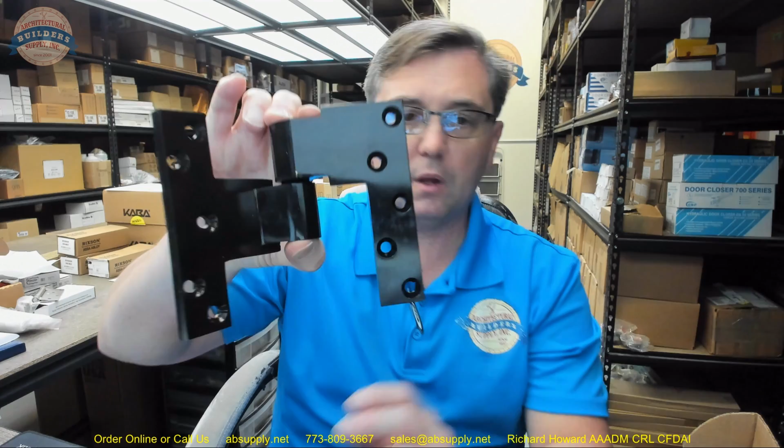And this video is going to serve as a visual review, a review over the ever-evolving oil rubbed bronze. It's awfully dark to me. I'm going to stop short in saying that it's black because under the reflection of a certain light, it will have a difficult to detect bronze tone to it.

You know, the issue with oil rubbed bronze, and I'm not an oil rubbed bronze apologist. It's a finish that's subject to interpretation in the sense of change. It is an unstable finish. It is manufactured by lots of people that all have a different process by which they do it, and it turns out differently every single time. Understand, when you order oil rubbed bronze finish, manufacturer A, manufacturer B, C, none of it's going to be exactly the same.

One hallmark of the old days, the second half of the 19th century, you would be able to buy all of your hardware from a single manufacturer. And what was nice about that, I imagine, is that their finishes probably matched pretty well across the board. This order has hinges from McKinney in oil rubbed, don't match this. Pivots from Rixson in oil rubbed, don't match that. Roller latches from DCI in oil rubbed, none of it matches. And it's because they're all different. That's all there is to it.

If you want a consistent finish on your hardware, order something that is by definition consistent. Oil rubbed bronze, or 613 or 640 for that matter. They're both oil rubbed bronze. 613 means on a bronze based material. 640 means on a steel-based material. The definition of either of those is inconsistent. So I suppose just be mindful of that.

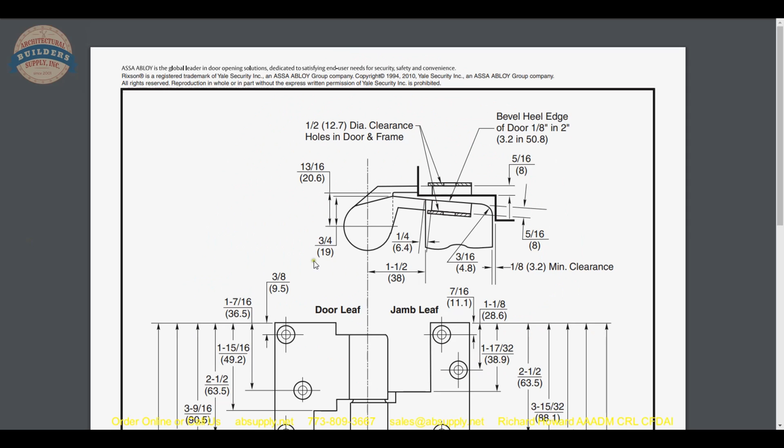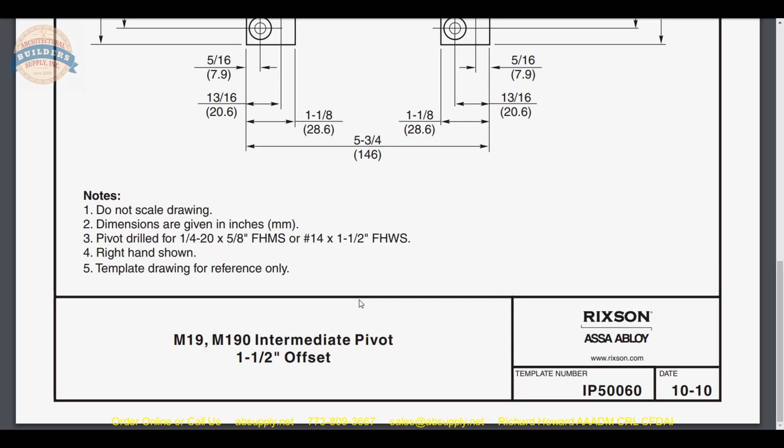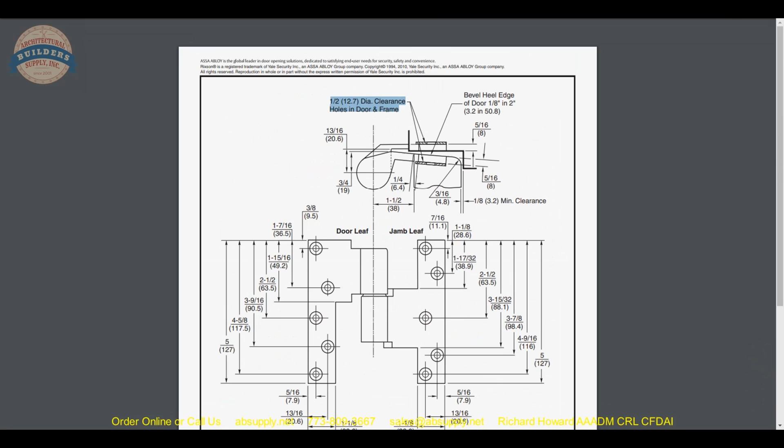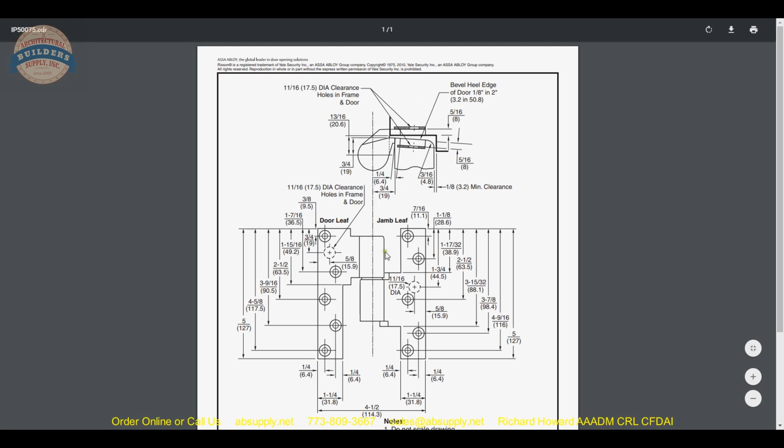The only thing I can think of is that might be a reference and not belong on here, to when you are doing an electrified pivot. That would make sense that you would have a 11/16 inch clearance for that. Yeah, they're showing that same sort of reference. They show it here and here as well,

and not here. I just finished saying that I've never seen anything on a template that doesn't belong there. But in this case, it doesn't belong there. This is not an electrified pivot. So you have all of these dimensional properties, and that will help you definitely lay out what you're working on.

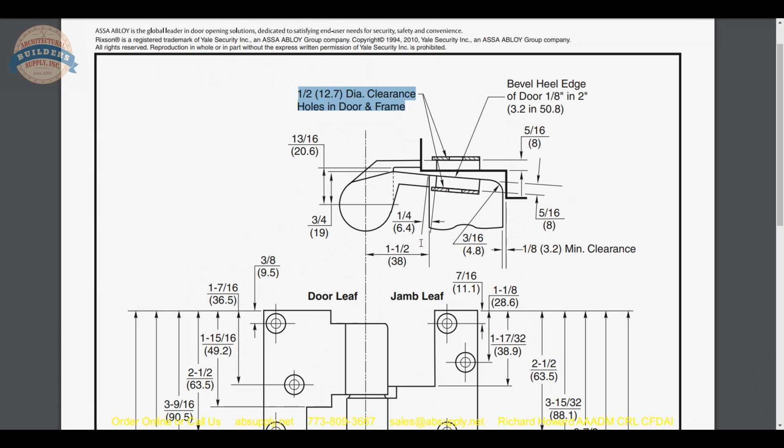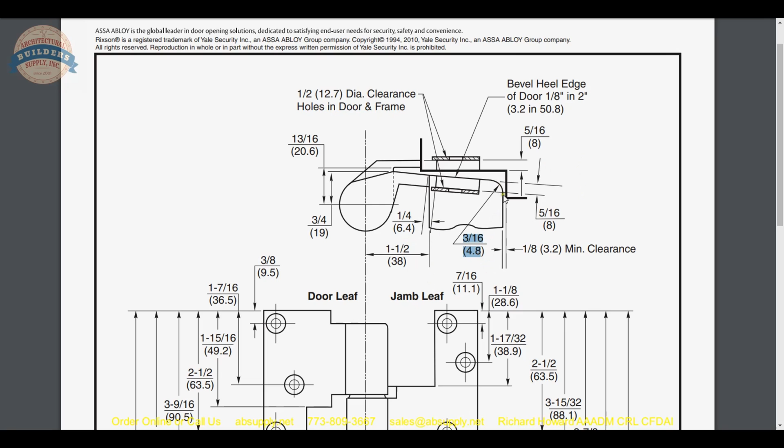There are three notes here that are actually important. 1.5 inches, and we're going to talk about that. That is the center line of the vertical axis of pivoting measured from the face of the door. Okay. The second is this 3/16 chamfer that they want on this edge of the door, and that you need to have 1/8 of an inch between the push face of the door and the face of the stop.

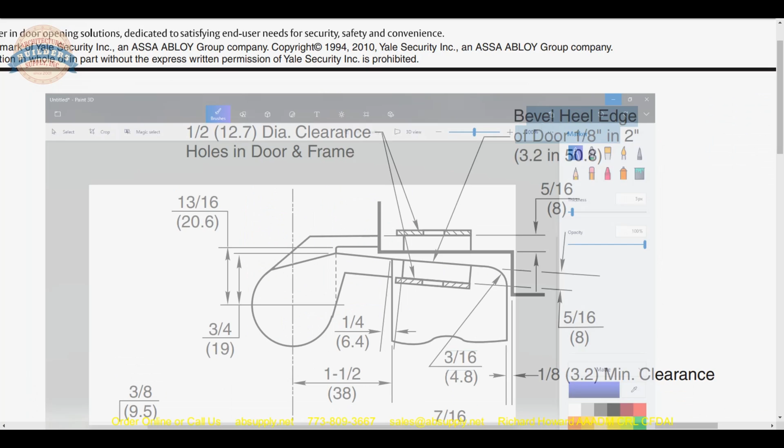That's number 2. Number 3, they want a beveled edge door here, to relieve the possibility that you're going to be hinge bound, or in this case pivot bound. Best practice would be to put a bevel on here. 1/8 and 2, what does that mean? Let's talk about what that means now. Actually, I have a very elegant way to show you. Start by defining it as the following.

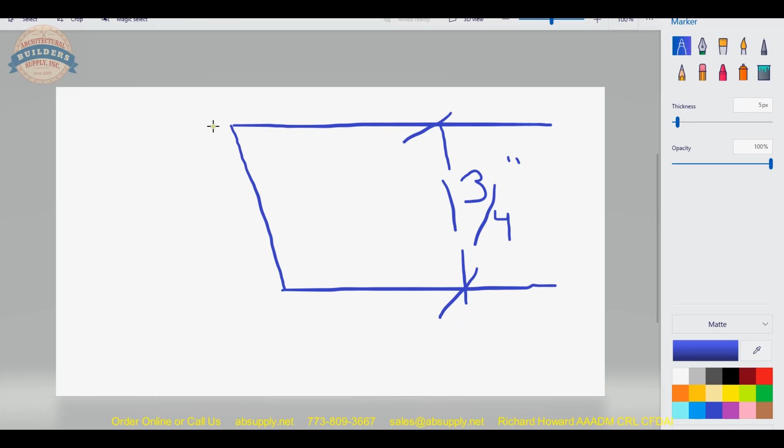You have a door that's beveled, and of course that bevel is very much exaggerated, and you have your thickness, typically 1 3/4 inch thick. Okay. The distance from here over is based on the formula 1/8 in 2.

If I draw this line straight down, the x dimension is the formula. This is 1/8 of an inch for every 2 inch in door thickness. Okay, that's 1/8 and 2. So obviously this dimension is going to be slightly smaller than 1/8 of an inch when we're dealing with a 1 3/4 inch thick door.

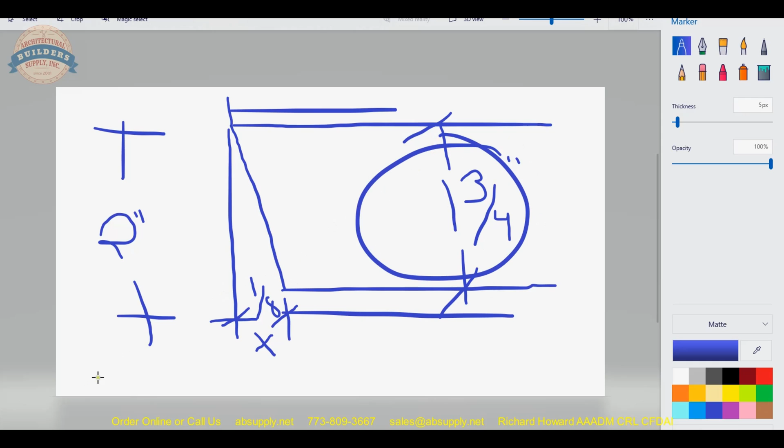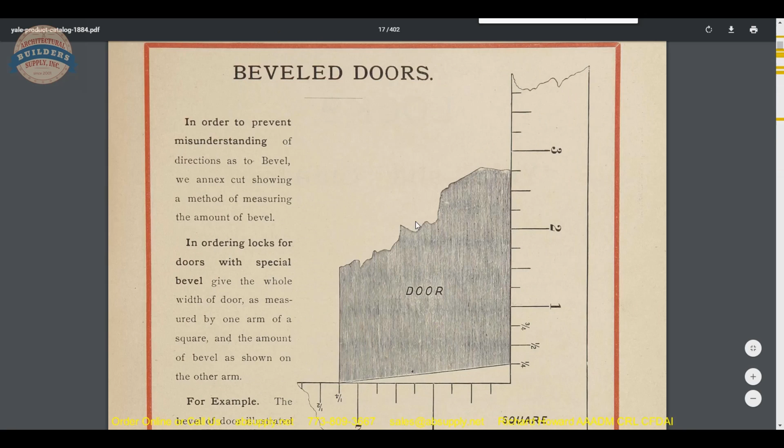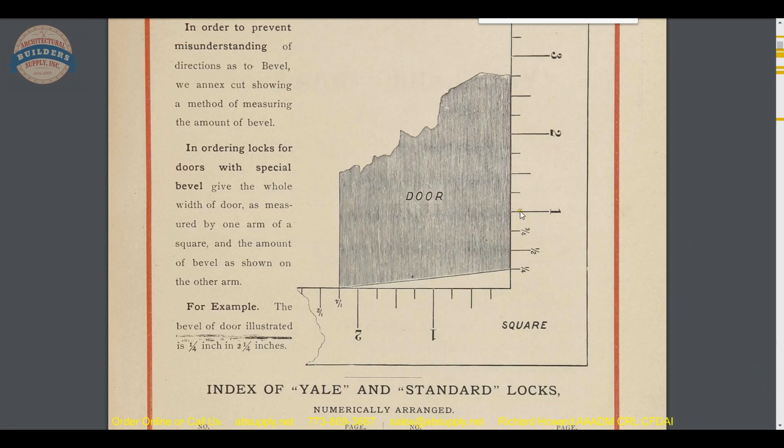A more elegant way to show it would be from a Yale and Towne catalog from 1884 that defines bevel for us. And this is a great drawing. Even though the formula is different, their bevel was heavier 130, 140 years ago, it does very nicely illustrate what we're talking about, 1/8 and 2. Okay, this formula was 1/4 and 2 1/4. That's a pretty heavy bevel.

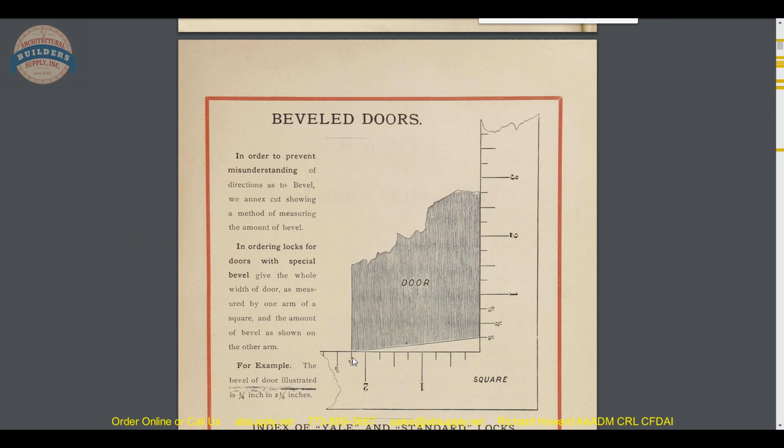Definitely not necessary to be that heavy. 2 1/4 doors must have been very common if they're going to use that in their catalog to define that.

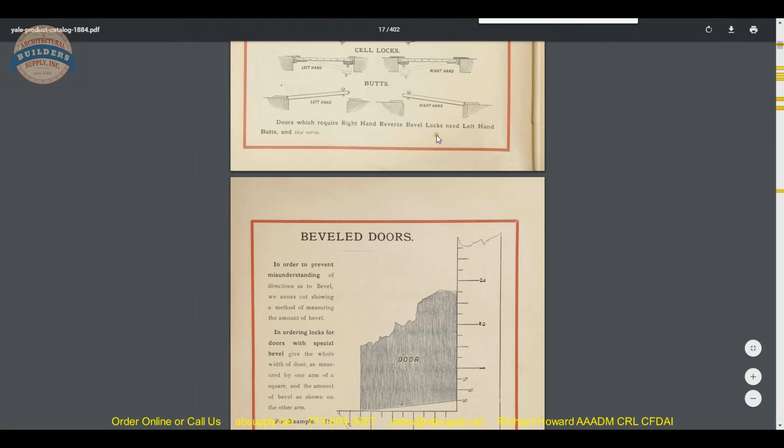If you're interested to see that catalog and more of the 400 pages of it, anywhere from within our website, get to the manufacturer's page, Control F, Yale, search basically, Yale, and then you'll come up with all these archival catalogs that we have here. Very interesting. Okay, and it's a sister company of Rixson. So that's the third thing that's important on the template page.

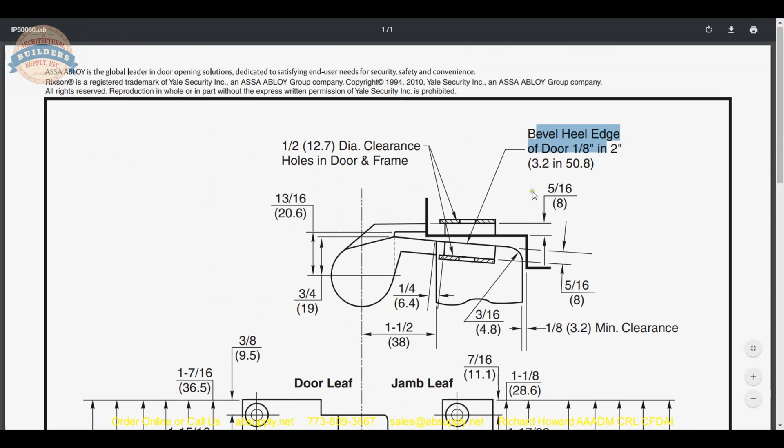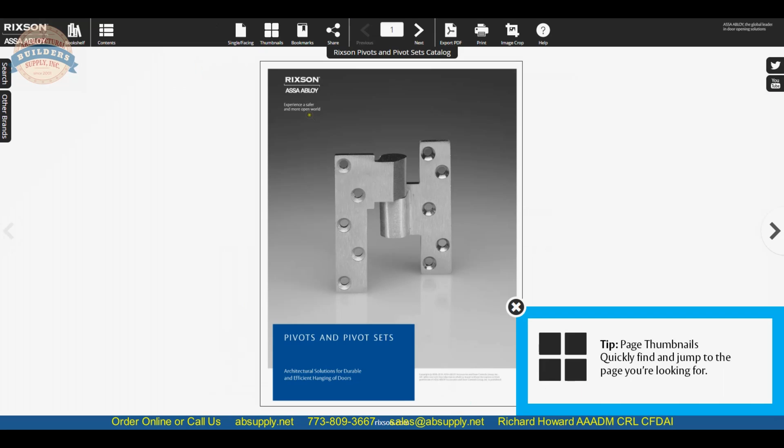All right. Now let's move into the installation instructions. So looking at the template, let's talk about this 1.5 inch dimension. And that will get us looking at also the catalog that is also here, because in the front of the catalog they ought to define, yeah, they do. 1.5 inch offset. Offset is the distance from the face of the door to the pivot point, what I call the vertical axis of pivoting.

Extended offsets should not be used unless there is cladding on the face of the door or there is trim to clear on the frame. 1.5 inch offset arms and pivots are for doors with cladding or trim that project 3/4 inch from the face of the door. The greater the offset, the less weight can be carried by the pivot. So what they're really talking about there is you have a frame, okay, and you have your offset pivot.

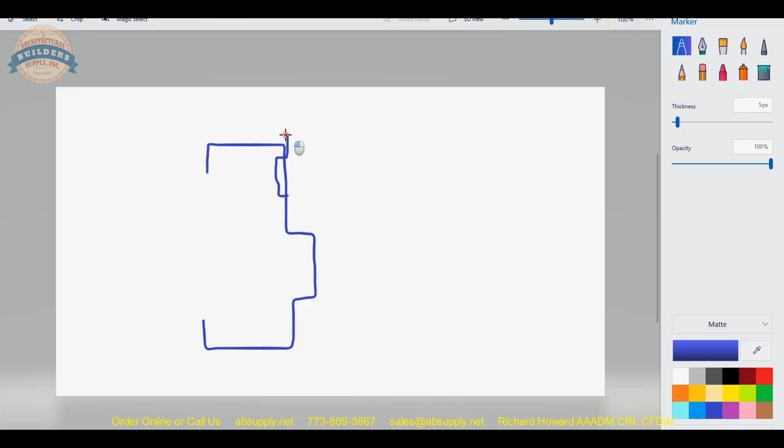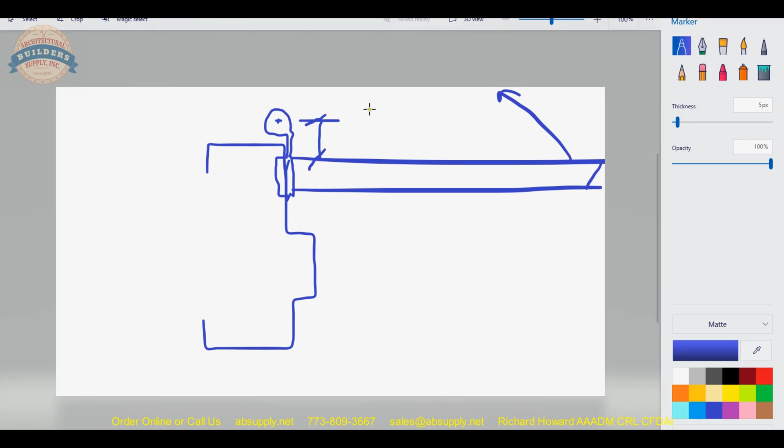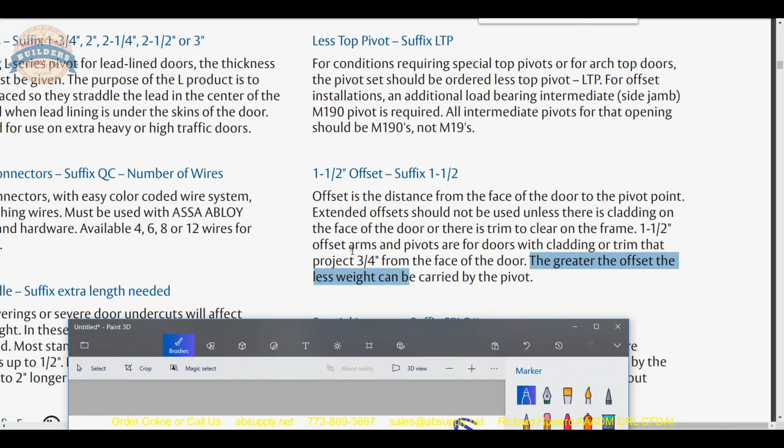Okay, you've got your door. So what they're saying is that center line to the face of the door, that's 1.5 inch on this pivot. It is normally 3/4 inch. That's the standard pivot. So when they're saying to us that offset arms and pivots are for doors with cladding or trim that project 3/4 inch from the face of the door. Okay, well, 3/4 inch plus 3/4 inch, that's going to be your 1.5 inches. So if you need the greater offset, you'd be in good shape.

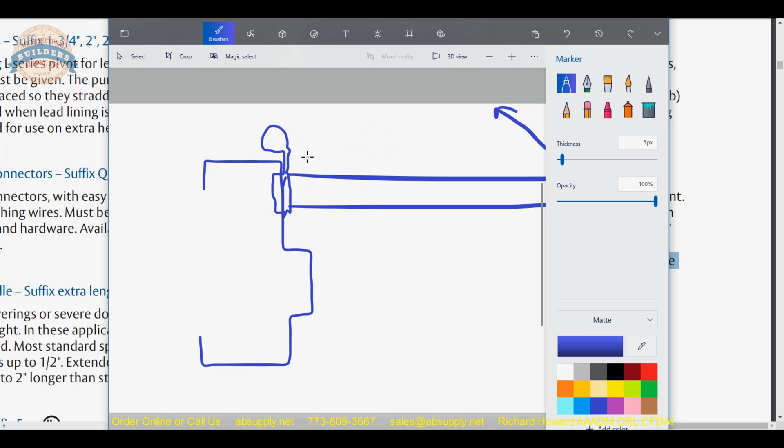Meaning, you've got something happening, they're saying cladding on the door, something that builds out like this. You've applied something, let's say, to go with some sort of woodwork trim that's on the wall. That could be the case. There would be no reason to use 1.5 inch offset unless there was a specific reason to use it, such as the cladding, as we had just spoken about.

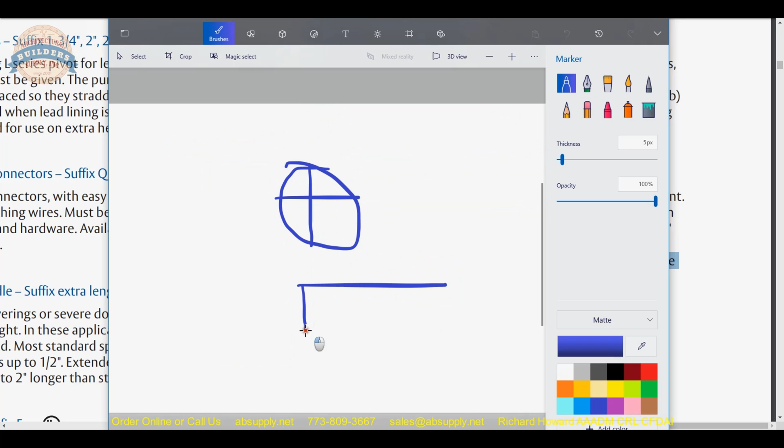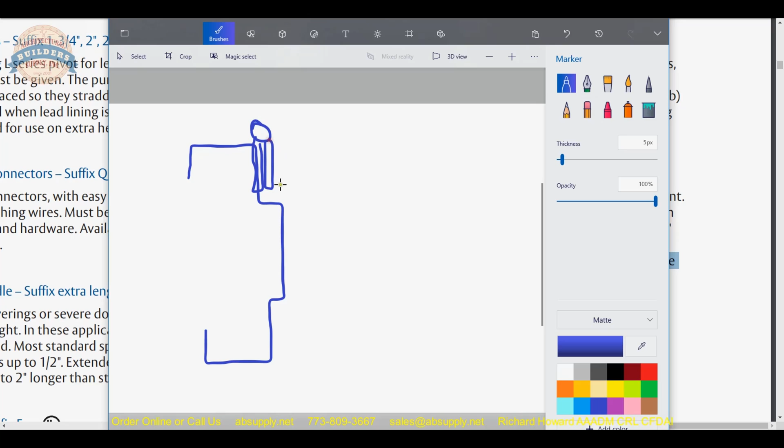Now, that's not inherently a problem on its own, but if you have a wall condition that would restrict that door opening properly, then you need to kick the dimension, the vertical axis of pivoting, off the face of the door even more. Another reason why you might just need 1.5 inches is because in our same frame scenario, you've got your pivot, okay? Say you have a partition wall, okay? Probably no reason at all to have anything greater than 3/4 inch.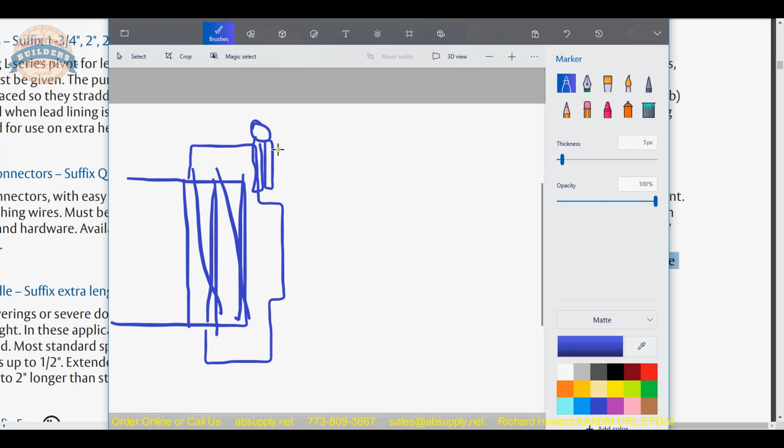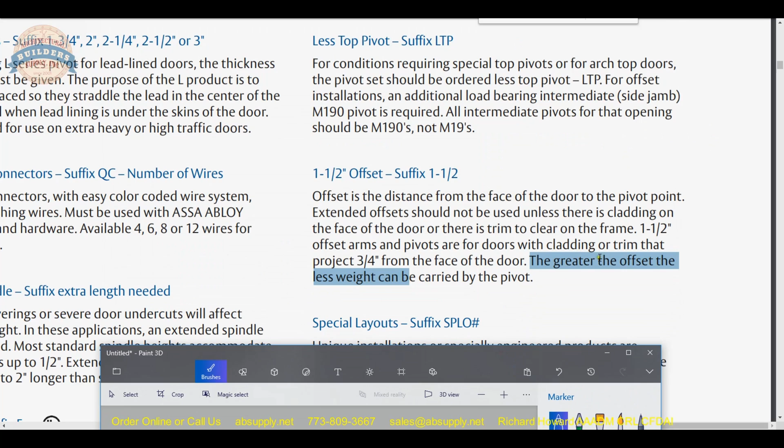And in fact, it might be nice if it was as small as possible, because you really want the vertical axis of pivoting as close to the face of the door as you can, because as they say here, the greater the offset, the less weight can be carried by the pivot. Well, that stands true for hinges as well.

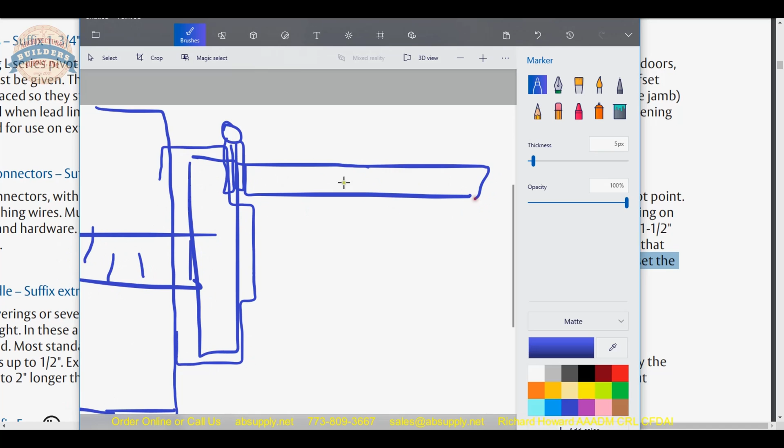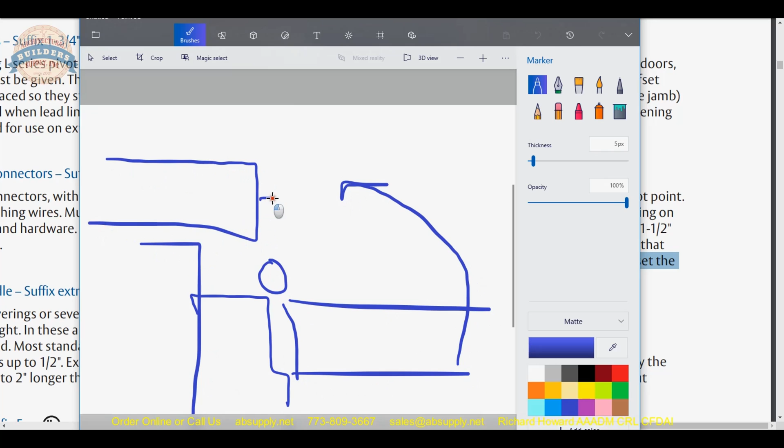Well, what if you were doing an application with 8-inch block and a 5 3/4 frame, and you ran a T-anchor, okay, and your client said, you know what, we're going to go with a standard 5 3/4 frame, but here's my wall construction. I need to be able to take my door and swing it out so that it now is going to be like this.

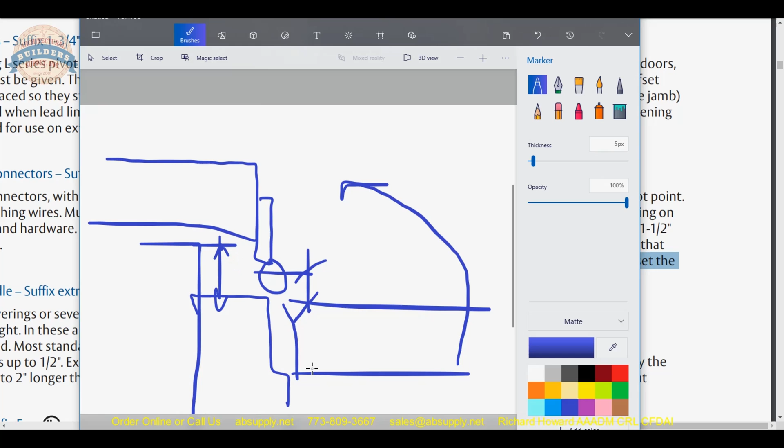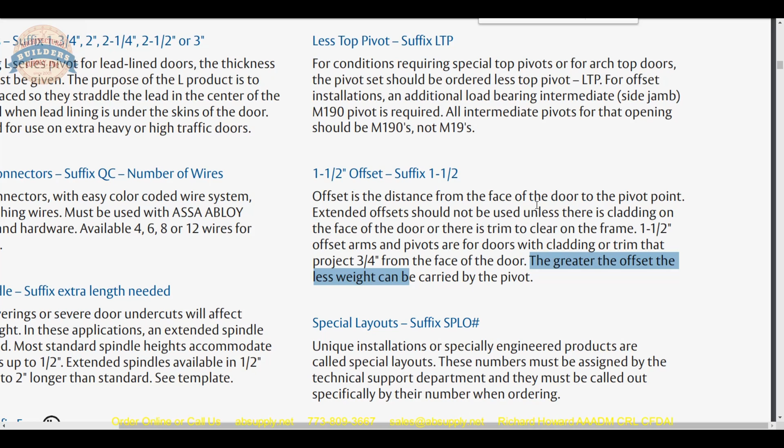So that dimension now, what we're offsetting from the face of the door to the vertical axis of pivoting, could also be because I need to clear this unusual circumstance. So whatever reason you're offsetting it, there will be a reason that you're offsetting it. Whatever the reason is that you're going to offset the pivot, it's going to be because you need to clear something, okay? And that's just where that stands.

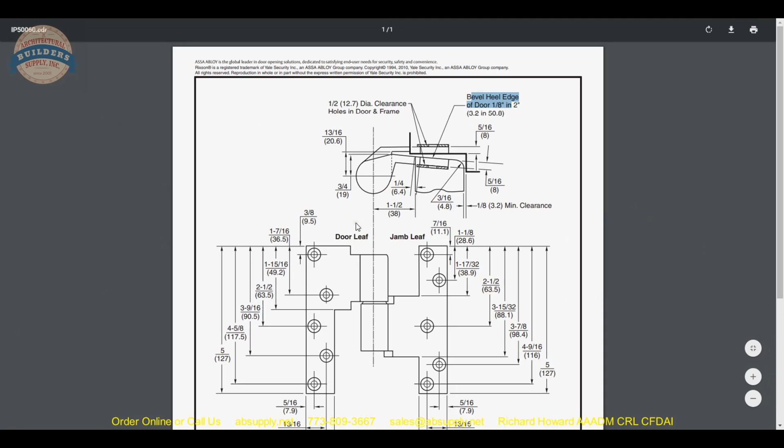And that's this defined. The standard pivot is 3/4 inch. Now, as we slide back to the template, after talking about why that dimension is important, use it accordingly. You're only going to use 1.5 inch offset when you need to. So let's click over to the installation instructions. All of page 1, with the exception of that 1/2 inch reference, will be identical.

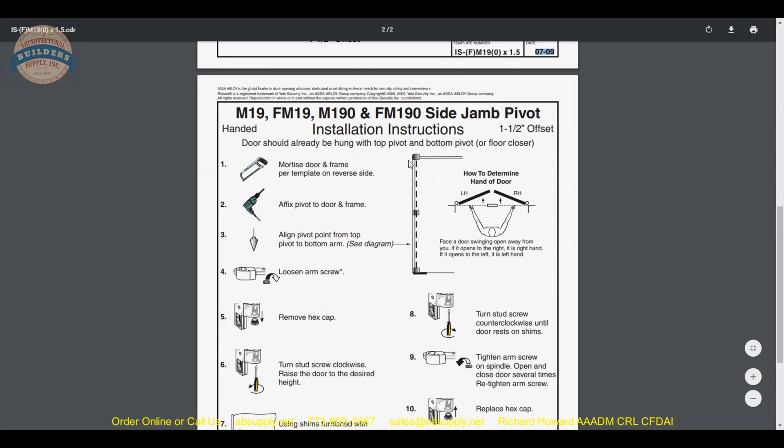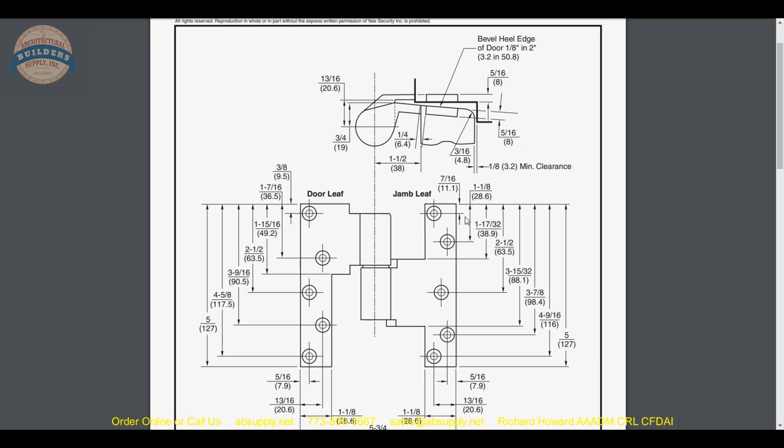And now when we move to page 2, once upon a time, this sheet never existed. There were no installation instructions. This was your installation instruction. And really what you needed to know was this: 1/4 inch. That's it. You have that, everything else is going to fall in place when you make sure that you observe this. Okay? And that you are observing this.

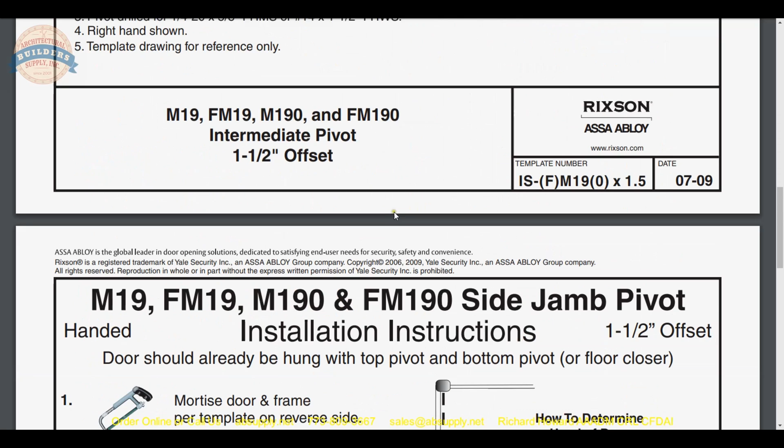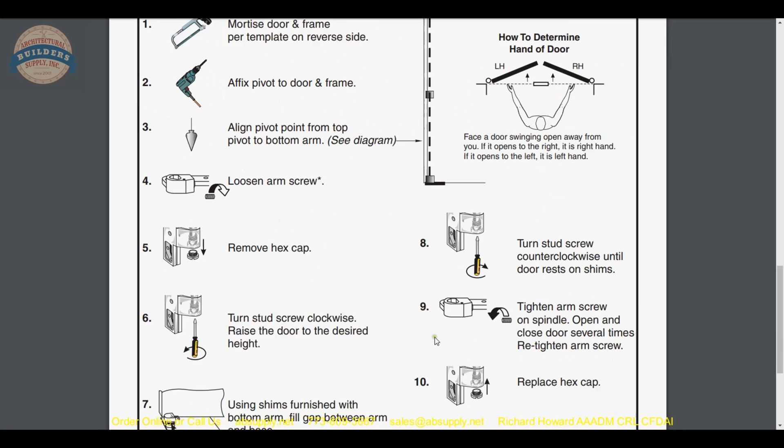Page 2 of the installation instructions, as far as I'm concerned, may have been a response to, I'm just guessing here, Ives has a very simple method of installation where they have literally a page that looks like this. It's not a lot to it. Obviously the most crucial thing is that you have a plumb installation. Absolutely plumb. Okay? It is so important that they offer a tool for this. That tool is in our site somewhere. I just don't recall what the name of it is.

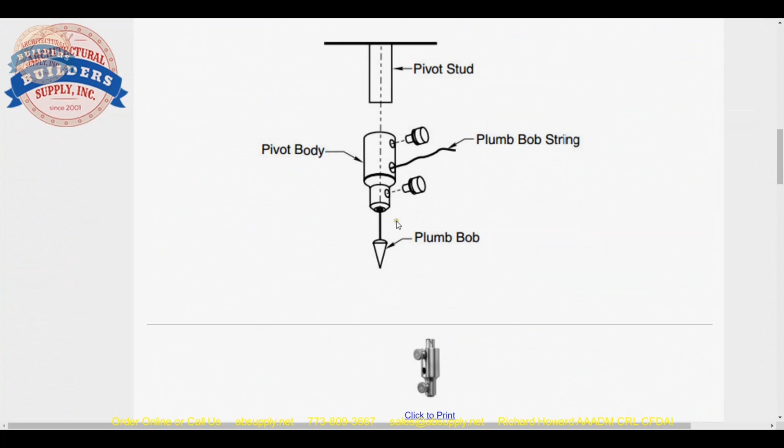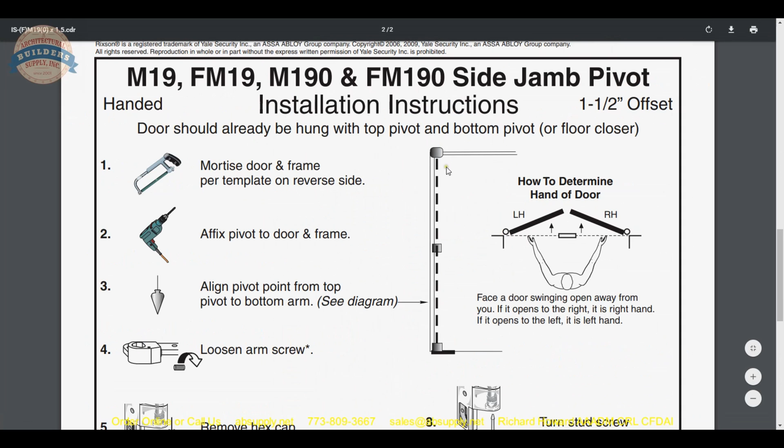And at long last I have found it. There are 2 of them, these pivot closer alignment tools. There's the 2604 and the 2608. The 2604 is probably the one that you'll need because the 08 is used for the extended top pivots. So the Rixson 2604 is used accordingly. Great tool to be able to help you strike that plumb line. That's absolutely mandatory. You need to provide the plumb bob and the nylon string naturally. So that's a great tool because this is what's absolutely most crucial.

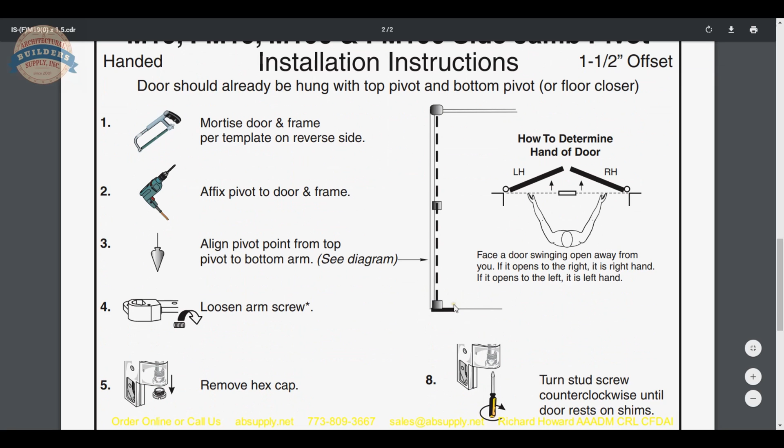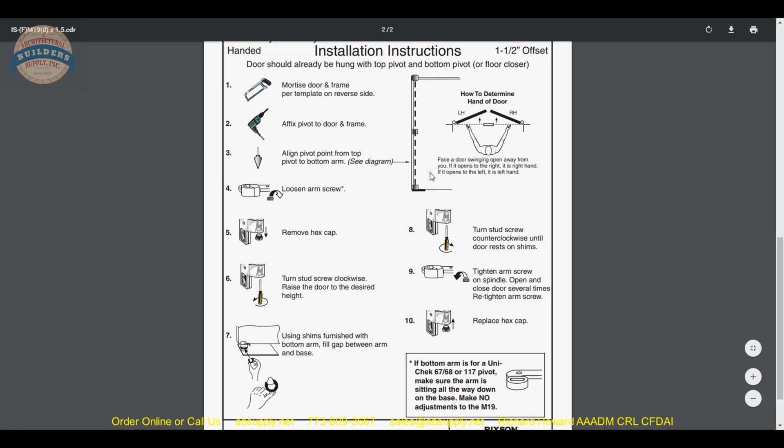Okay. Also, what's crucial is that the wood door, if it is a wood door, everything be reinforced properly. I've had people install pivots, and they've ended up cutting the door down so severely that it's being attached to basically particle board. So as we look at the installation instructions, obviously all the things that you're going to need here, but these installation instructions are really for a complete set of pivot hardware. And we're looking at only the intermediate pivot.

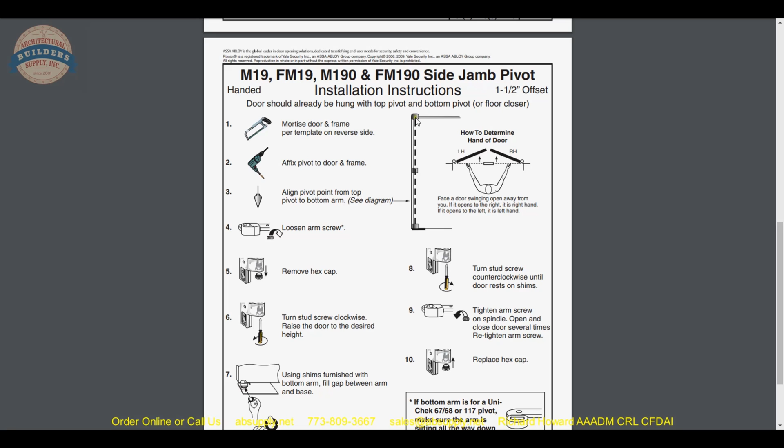So generally what's going to be done is someone will mortise the top of the door and the header, really, for the 180 1.5-inch pivot, drop that plumb bob down, strike where you're going to have your vertical axis of pivoting on your bottom pivot. And then when you mortise your intermediate pivot, according to the template, it should line up perfectly. And that's all there is to it. Templating, machining for this is a very simple proposition from the door supplier, because you're basically just going to create in the door leaf this rectangle. You're going to obviously have to create this notch all the way through the door, okay, for it to be able to exit accordingly.

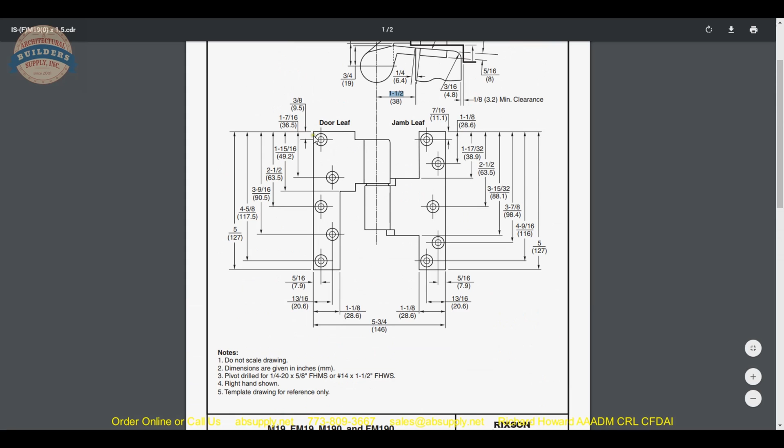Admittedly, it's handy to have the hardware in your hand, and we are looking at a right-hand version here. So when you prep this rectangle, all of this gets opened up, but so does this area all the way through the door. Okay, not very clear on the template that that's what you're doing, but there's no other way to make this pivot work when you look at, frankly, the dimensional properties of the item.

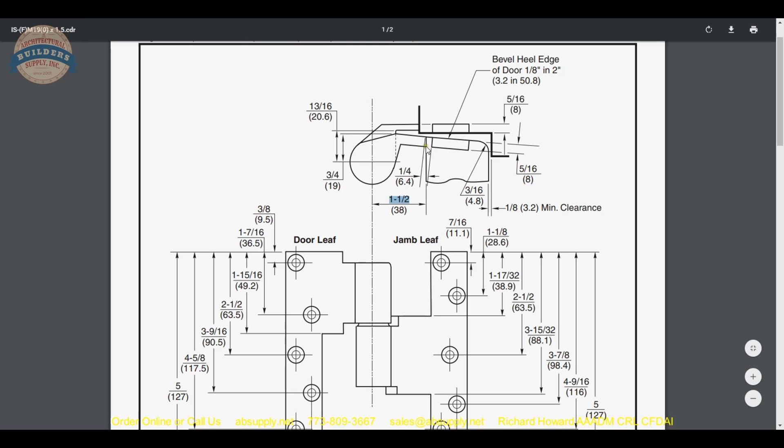And it is true to say that while it may not be completely obvious, when you mortise your door leaf for this 1.125 wide portion at this reverse 1/4-inch backset, if I can call it that, there's no way to be able to just leave that shy 1/4 inch here and not chisel through the face of the door for this portion here, this height, which they are very importantly giving us as 1 15/16 of an inch.

It is not necessary to have the hardware when you're mortising for this material, but from the perspective of someone, myself, who has mortised for every piece of equipment really possible, it's very handy to have the part there because it allows you to do a reality check, especially when it's the first time that you're doing it. And if you've done it multiple times, then yeah, the template's going to be adequate. But it is handy, not required, but it's nice to have the hardware because you can guarantee the fit as well.

And ensure that it's going to go to the job site and actually fit and work the way it's supposed to. So that mortise is going to be up here too. It's this rectangle, but it's this notch that you'll do through the face of the door for that extra 1/4 inch, that 1 15/16 height.

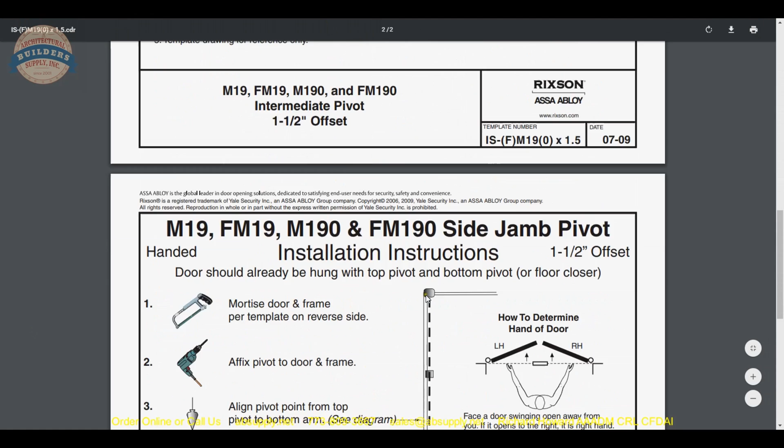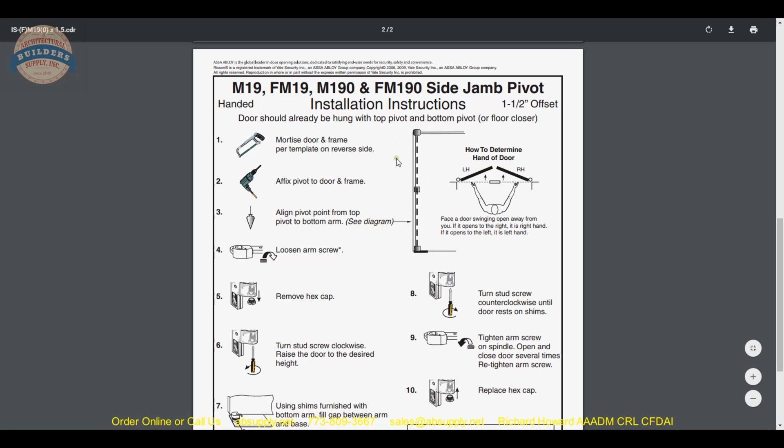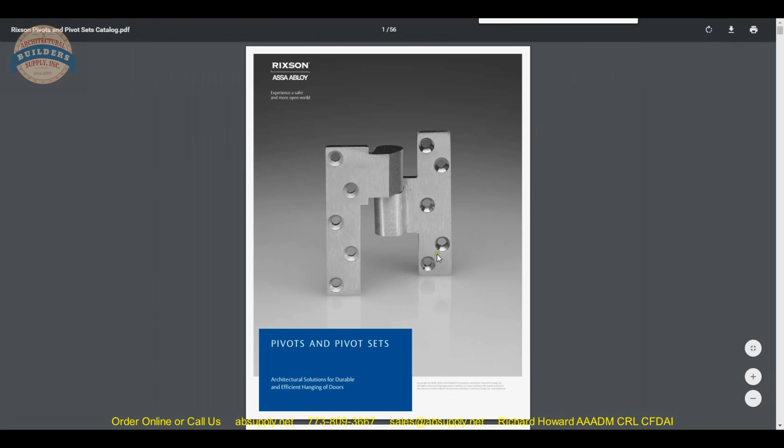Now, as we get back to the installation instructions on this, again, it's for the entire gizmo. Like I said earlier, the top header pivot will go in, strike a line, and then machine the intermediate accordingly, and I think you'll be in real good shape. There's also a link to the product catalog here, which is a really nice reference guide to all things Rixson pivot related. You want to see the M190, just Control F for M190 and you'll be able to get to it. Why is the M190 important and why is it used?

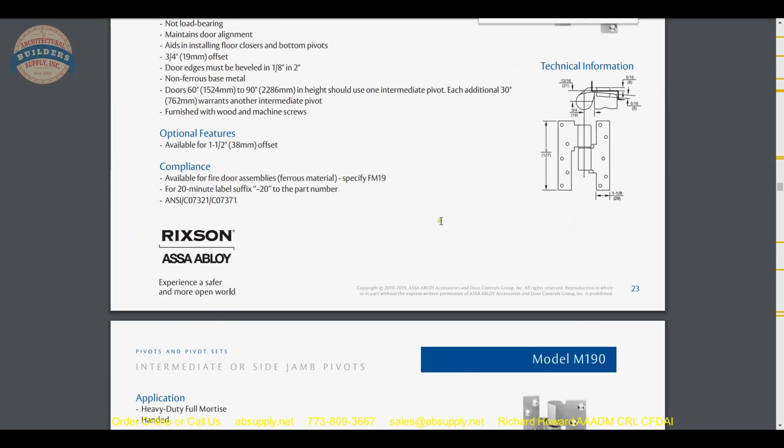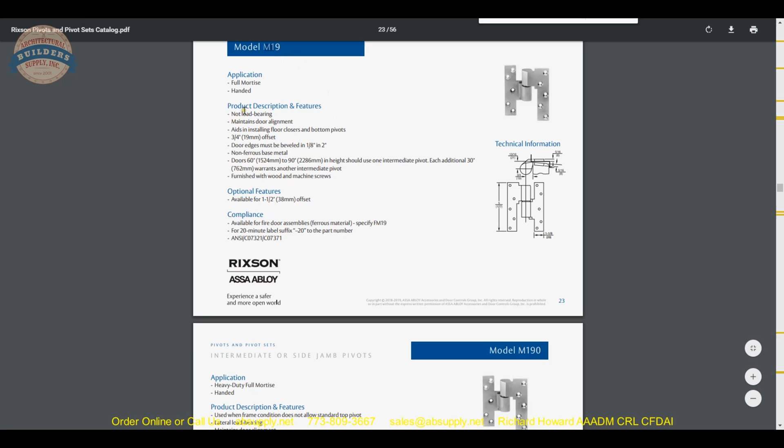Well, the reason that I like to use it is when you are doing a job that's going to require, bear with me, I want to make this point. The M19, your standard pivot, not load bearing. Okay, this is not intended to handle any sort of weight. You get into the M190, that's where you're going to have load bearing.

So people will use M190s where? Well, when you want to carry some weight. But when you have an installation like an arch top, a radius top door, where you don't have a top pivot, you're going to use load-bearing M190s in that sort of installation to properly hang the door. Okay.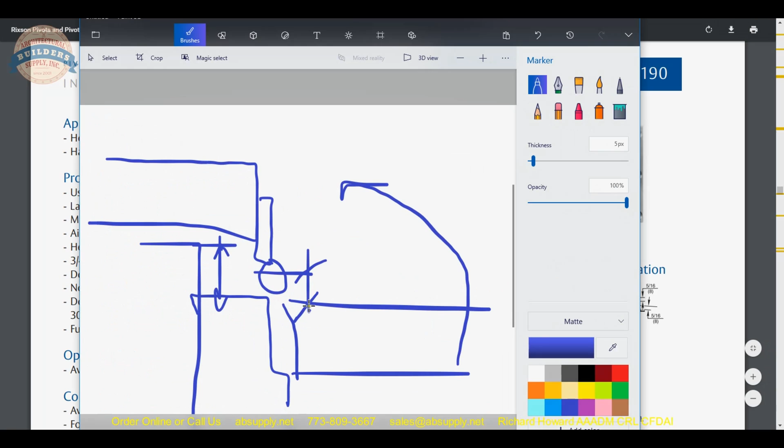That's going to really mean that when people use pivots, they very often are thinking they want to use a piece of hardware on their door. When someone says, I want pivots, what they're really saying is, I want hardware that I can't see sometimes. So what they're going to want to use is a center hung pivot, where that vertical axis of pivoting is right through the center of the thickness of the door.

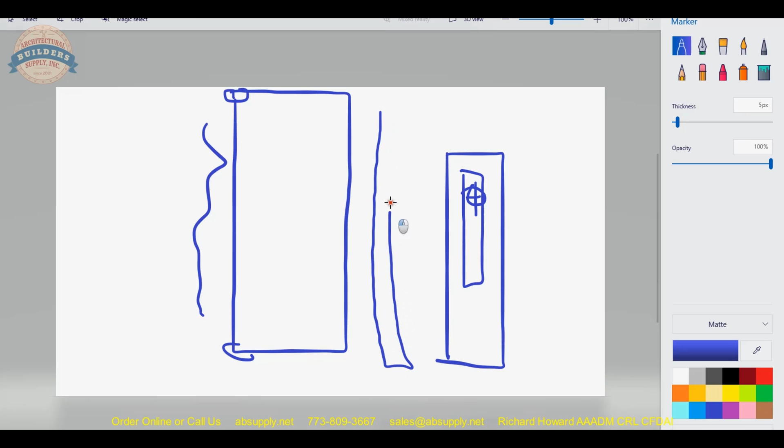Okay? The problem with center hung pivots is you're pivoting it up here and down here, and there's nothing in the middle. So if you hang your door on center hung pivots where there is no intermediate pivot, and you have any warp at all in your door, you can count on the door manufacturer not giving you a warranty because you've not what they call properly hung the door. And that's where maintaining door alignment is required, but only possible in offset pivots, either 3/4 or 1.5 inches.

So if you want a door to be properly hung, it would need to have an intermediate pivot, but there's a definition for that. For doors up to 60 inch, 2 hinges or pivots are okay. For every 30 inch after 60, you're going to add a third pivot, intermediate pivot, or hinge. For every 30 inch thereafter, you're going to add an additional one. So from 60 to 90 inch, you've got 3.

So doors up to 60 inch, but not including 60, will have 2. 60 to 90 will have 3. Over 90 and up to 120, you'll have 4. Pardon me. Yeah, that's right. You'll have 4. So you need that intermediate pivot to help maintain that door alignment.

Aids in installing floor closers and bottom pivots. I would think so, because it's going to help keep your door in alignment. Trying to get a door closer to work on a warped door is going to be a challenge, because your door is not going to be sitting on your hardware very straight. Heavy duty needle bearing: when you look down into the hardware itself, and we'll inspect it before we wrap this video up, you're definitely going to see that.

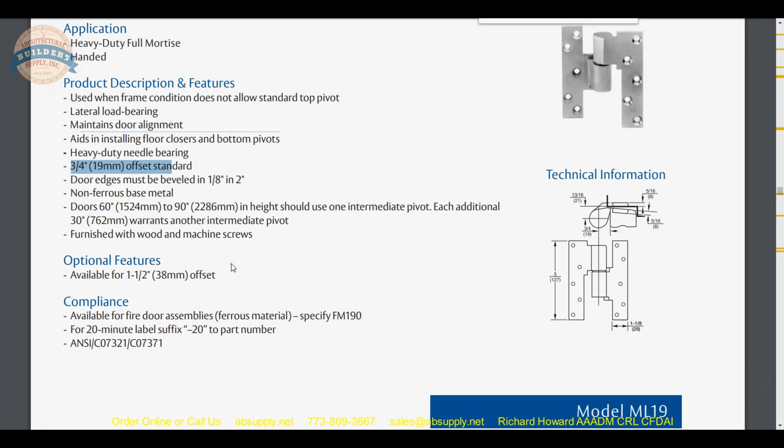3/4 inch offset is standard, but we're doing 1.5 inches. Actually, I should probably see where they're referring to the 1.5 inch version.

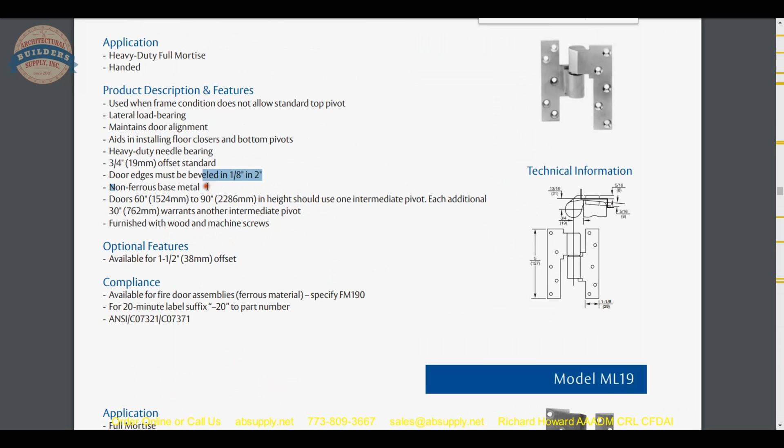Which I don't see it immediately. Non-ferrous base metal. Yeah, this is going to be brass, or it's going to be stainless. And this is the definition of where I just talked about the quantity, furnished with wood and machine screws. There's your optional feature. There's not a separate page. I just missed it. 1.5 inch offset. They can do these up to 20-minute rated as well. Be sure to specify that FM190.

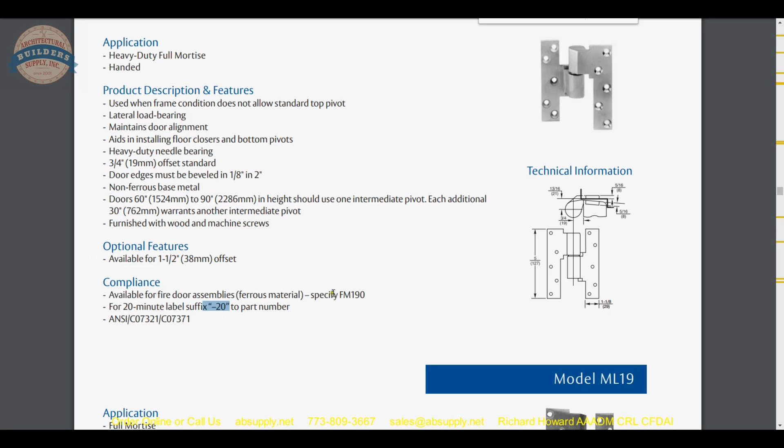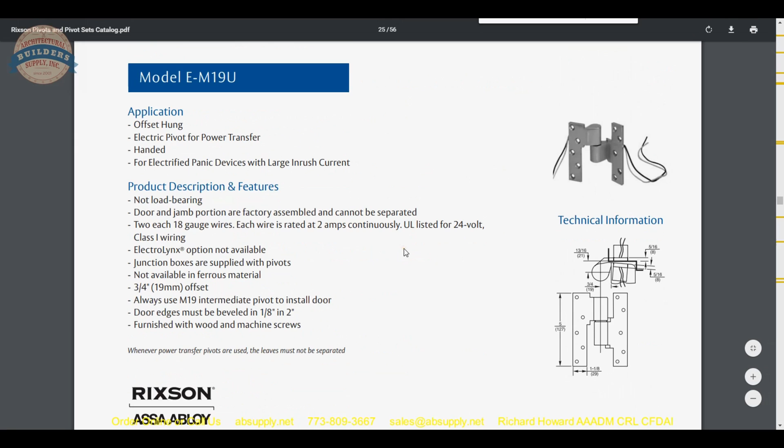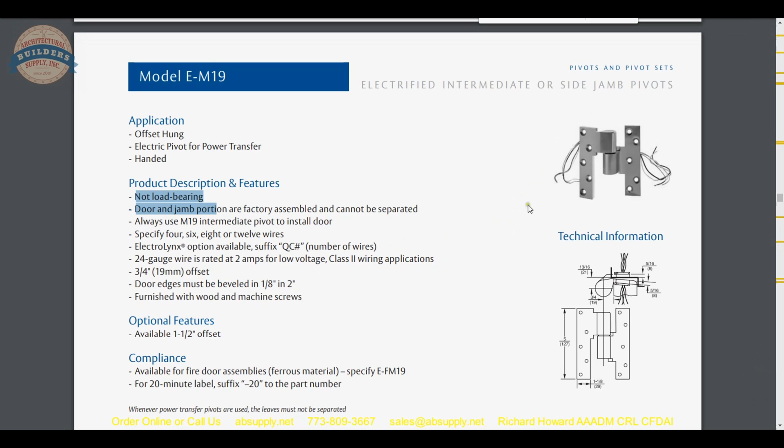I don't know that they'll do electric transfer in 1.5 inch offset. They will. You can do an EM19. That's inherently going to be a non-load-bearing hinge when you need to pass wires through it. 2, 4, 6, 8, 10, 12 wire, most likely. If you want to do monitoring on the door, switches, request to exit, annunciators, anything that you can imagine that's electrified, this would be available in a through-wire model as well.

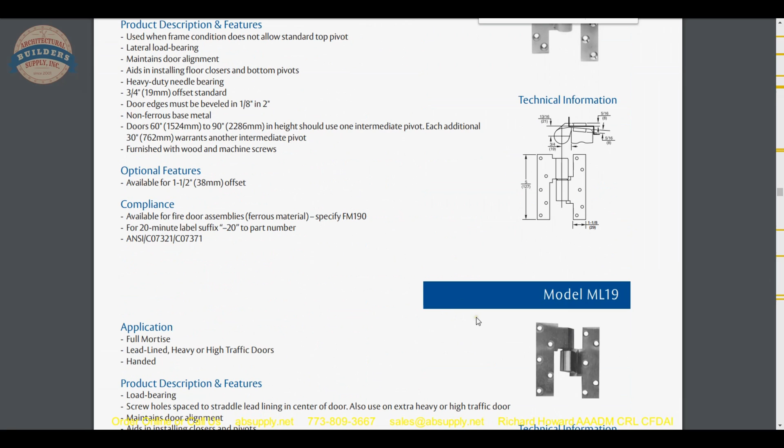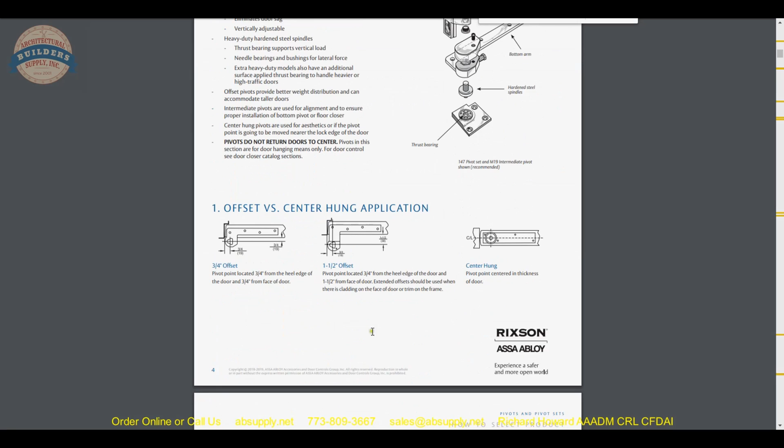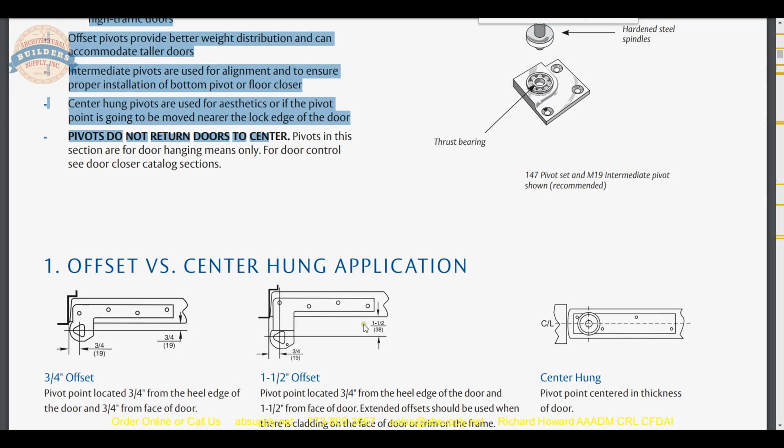Okay, so really handy document that's here that you can review all of the pivots. And if you deal with pivots relatively often, I would recommend that you review and read the general information area. What pivots are used for? And I won't go over it here, but it's all here. And this was the part earlier that we were demonstrating. 3/4 inch offset, 1.5 inch offset, and then your center hung. Okay, really pivot hardware 101 type information that should be reviewed, etc. Let's wrap up this video.

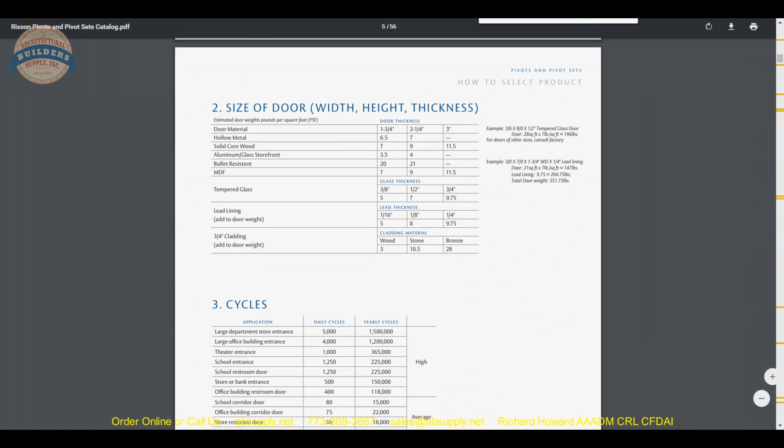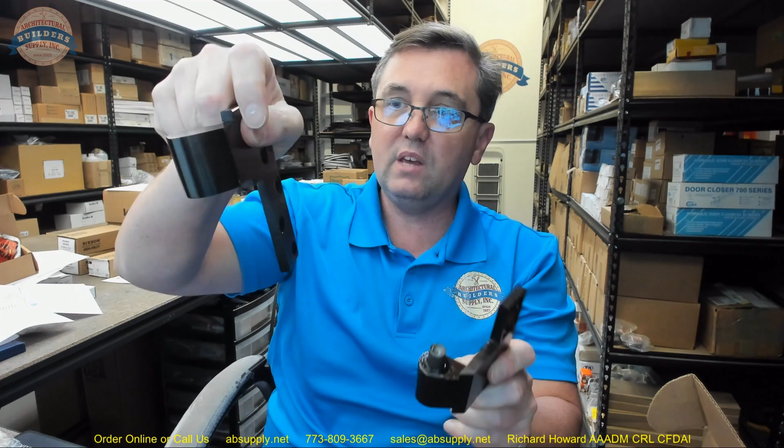And here is that needle bearing that we were talking about. This is going to be the door leaf that will sit, the female portion will sit on the male portion. Obviously, that's going to carry the load. That's that needle bearing that's in there. And that's what makes these handed. This is put together this way. In this piece, this is handed through and through. There is no way to reverse these parts. They are literally made as handed units. From your perspective, you are pushing on the door, and it will swing out to the left. I'm on the outside. From my perspective, it's a right-hand reverse. Okay.